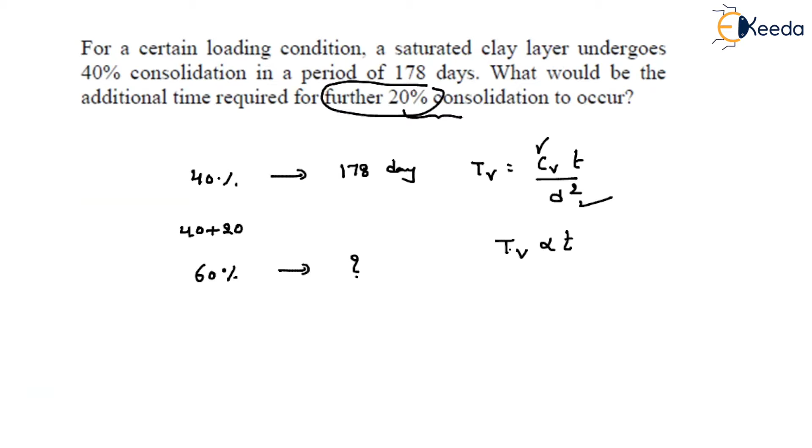As we are talking about a particular soil, Cv is constant, and we are not talking about the drainage path, so d is constant. So time factor is directly proportional to t. How does the time factor depend on the degree of consolidation? If your degree of consolidation is less than or equal to 60%, the time factor is pi by 4 into U by 100 whole square.

Pi by 4 is a constant value, 100 is a constant value. So Tv is directly proportional to U square. So in place of Tv, I can say U square is directly proportional to t. That implies T2 by T1 will be equal to U2 by U1 whole square.

That's it. U2 is nothing but 60, U1 is nothing but 40, whole square. T1 is nothing but 178. From this, tell me how much you're getting for T2. If you solve this, we'll get around 400.5 days. Right. Now move on to the next problem.

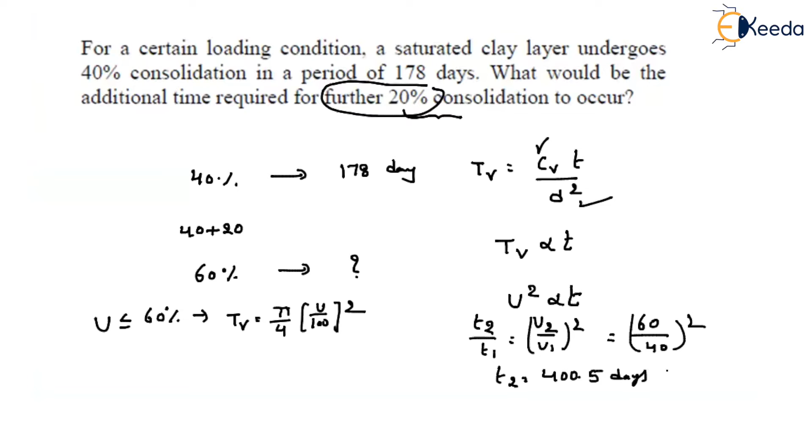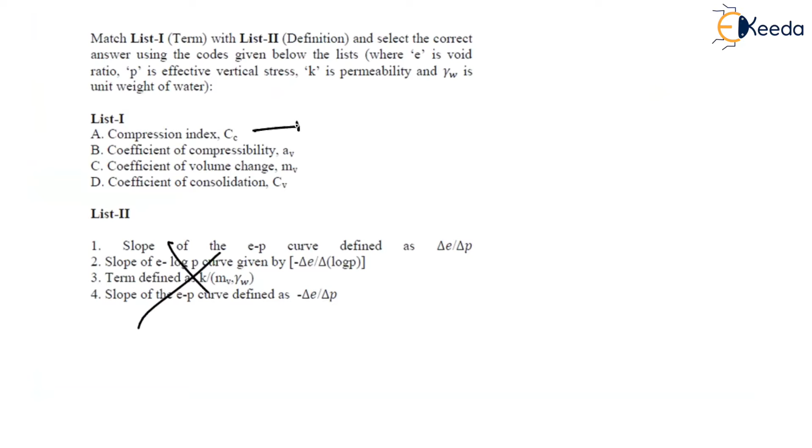Here also it is a match the following list. Let us forget about this list. Okay. What is the compression index? Compression index is the change in void ratio to the log of effective stresses, that means effective stress 2 by effective stress 1. What about coefficient of compressibility?

What is the difference between compression index and coefficient of compressibility? Only the logarithm. Compression index is a constant value. Compressibility will change from point to point. So what is the equation? Delta e divided by log of delta p. Let us say it simply. Sorry, it is not log, simply delta p.

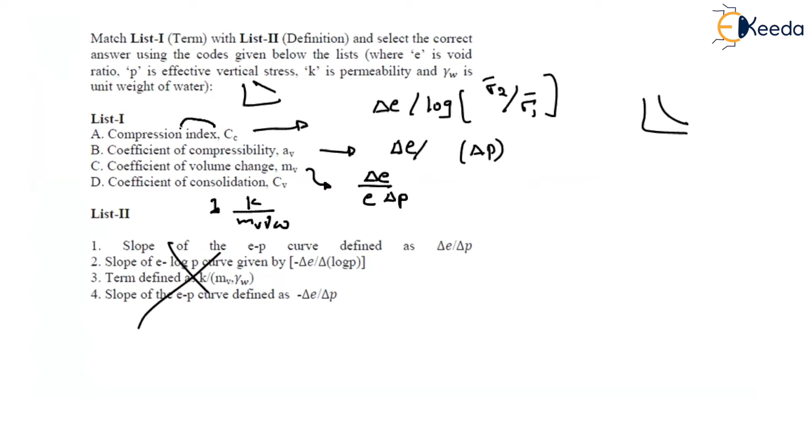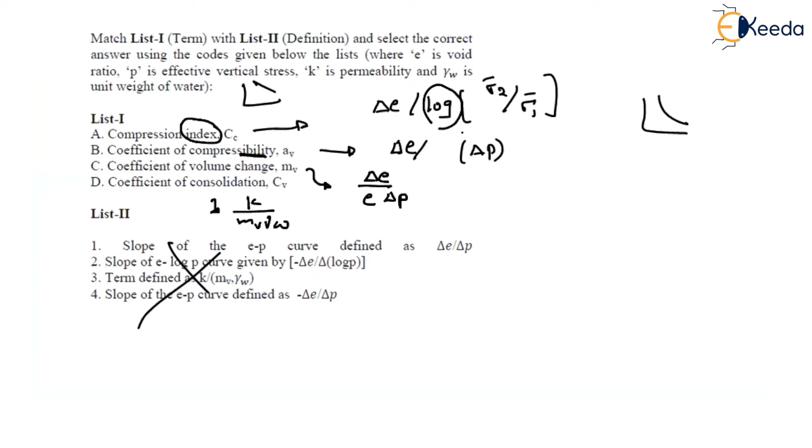I am talking about the index. Index means constant, so that's why remember that we will use the log. If it is simply compressibility, we don't use the log. This is the difference you have to understand. Move on to the next.

So what is given? In a laboratory test on a clay sample of thickness 25 mm, drained at top only, 50% consolidation occurred in 11 minutes. So there is a laboratory test conducted on the clay sample. What is the thickness of the clay sample? 25 mm. And it is drained at top only. That means it is one-way consolidation.

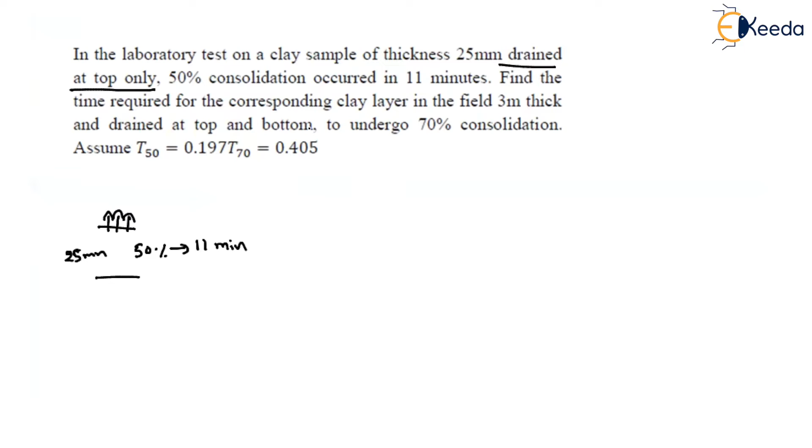So what is observed? To get 50% consolidation, how much time is taken? 11 minutes, right? Now what do we have to find? Find the time required for the corresponding clay layer in the field. That means there is a clay layer in the field having a thickness of 3 meters, drained at top and bottom. So in the laboratory it is conducted with single drainage, but here it is double drainage. So we need to find the time required for how much percentage?

70% consolidation. So what relation can we use? Time factor TV will be equal to CV into T divided by D square. The unknown we have to find is the time required. What about TV corresponding to 70%? If it is less than 60% consolidation, we directly use pi by 4 into U square. As it is greater than 60, in the given question they have mentioned 0.405. What about the D value? As we have double drainage, D is 3 by 2.

Now, what about the CV value? This CV value they have obtained in the laboratory. Apply the same here: TV will be equal to CV into T divided by D square. Now, what about TV, the time factor for 50% consolidation? It will be 0.197. What about CV? That is the unknown we have to find. Time required is 11 minutes, divided by D square. As it is single drainage, the drainage path is the total thickness of the sample.

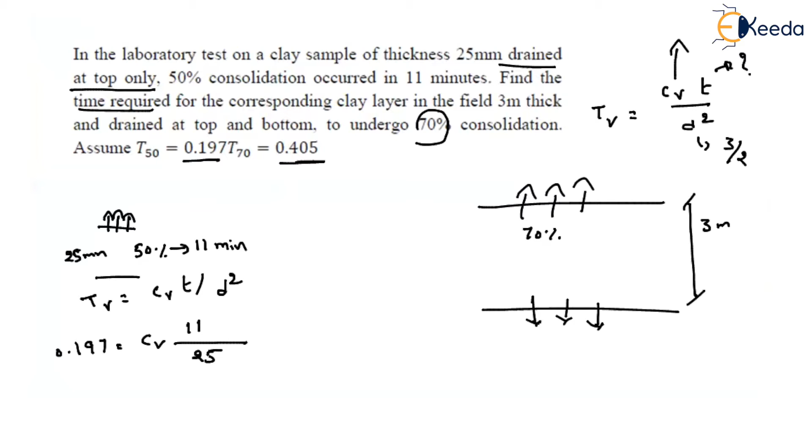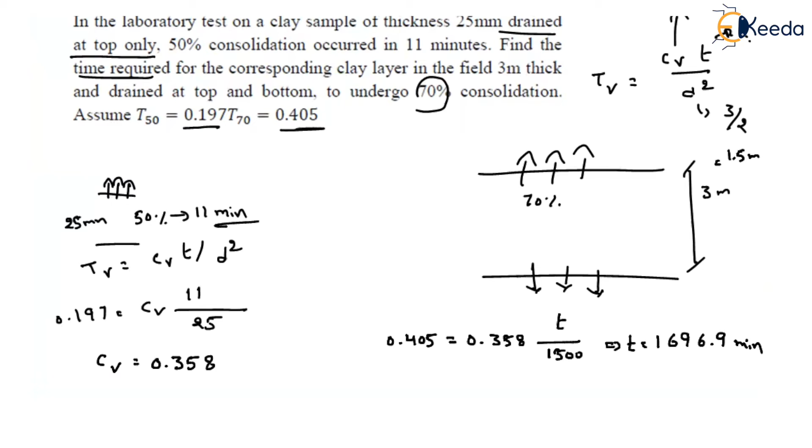So it's the same case, but in one case they conducted the test in the laboratory to find the coefficient of consolidation, and in the other case we apply it to the field to find the time required. Right. Move on to the next.

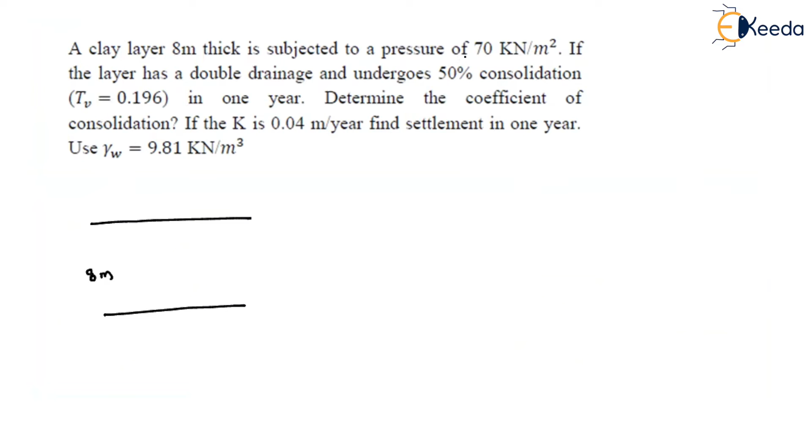What is the given question? A clay layer 8 meters thick is subjected to a pressure of 70 kilonewton per meter square. If the layer has double drainage and undergoes 50% consolidation in 1 year, determine the coefficient of consolidation. If K equals 0.04 meter per year, find the settlement in 1 year. Let us read again. There is a clay layer. What is the thickness? 8 meters. And it is subjected to how much pressure? 70 kilonewton per meter square. Okay, fine.

What they're asking: if the layer has double drainage, so water is expelling from both sides, top and bottom, and undergoes 50% consolidation. In how much time? In 1 year. So what we have to find? Determine the coefficient of consolidation. So first we have to find out the CV value.

If you find out the CV value, what is the formula? That is nothing but K divided by MV into gamma W. Or is there any other relation? We know the K value, but do we know this MV, volume compressibility? We don't know. Then how can we find out? Here they have given the time factor also.

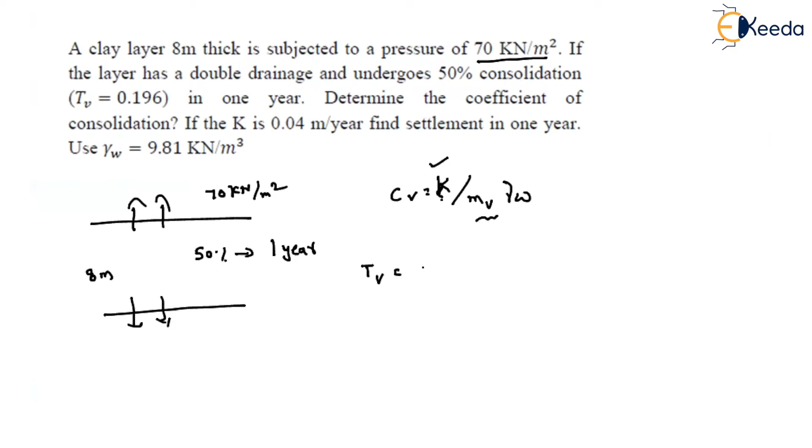So if they've given the time factor, the time factor will be equal to CV into T divided by D square. Corresponding to 1 year, 50% consolidation, what is the time factor? They directly gave 0.196. So 0.196 will be equal to CV into 1 year divided by D square; as it is double drainage, 8 by 2, 4.

That implies your CV value is 0.784. So this is your coefficient of consolidation. What will be the unit? Here you have considered the drainage path in meters square, divided by time considered in years. So that is meter square per year.

Now what we have to find? We have to find out the final settlement. So just recall the formulas to find the final settlement. In the given problem, did they mention anything about the void ratio? Did they mention anything about the compression index? No. Then how can I find it out?

By using the parameter MV. What is MV? It is delta H by H divided by change in effective stress, or change in pressure. If we can find this value, we can find the total settlement. So how? By using this relation: CV, 0.784, equals K value given as 0.04, also meter per year, so in the proper unit, divided by MV into gamma W.

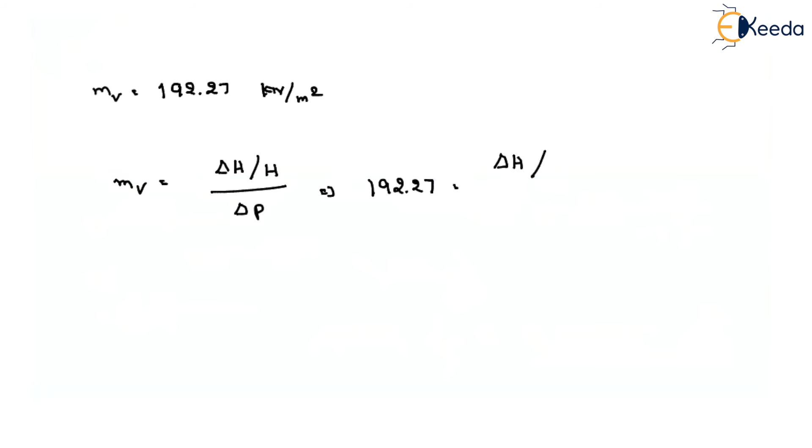That implies 192.27 equals final settlement divided by H, which is the total thickness of the clay layer, 8 meter, divided by change in pressure, given as 70. Now what about the change in thickness? If you solve this, you will get around 0.728.

I think we have done some mistake here, while finding this MV value. If you solve the volume compressibility, you will get around 1.3 into 10 power minus 3. Just recheck the calculation part, okay? Now the final settlement is observed to be 0.728 meters. This is the final settlement that will occur in the clay layer.

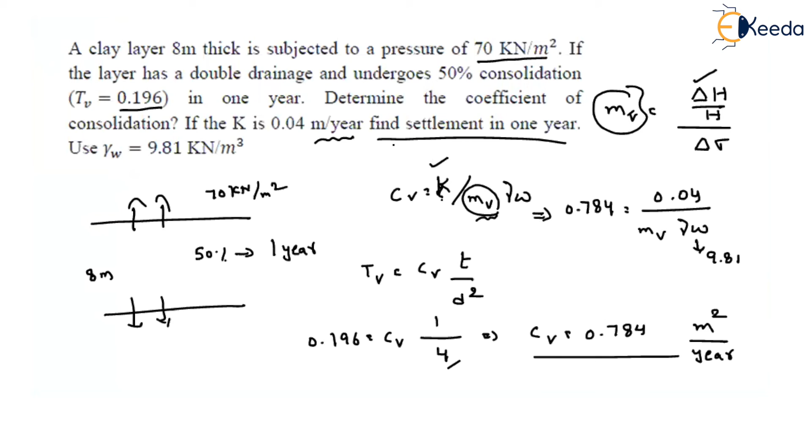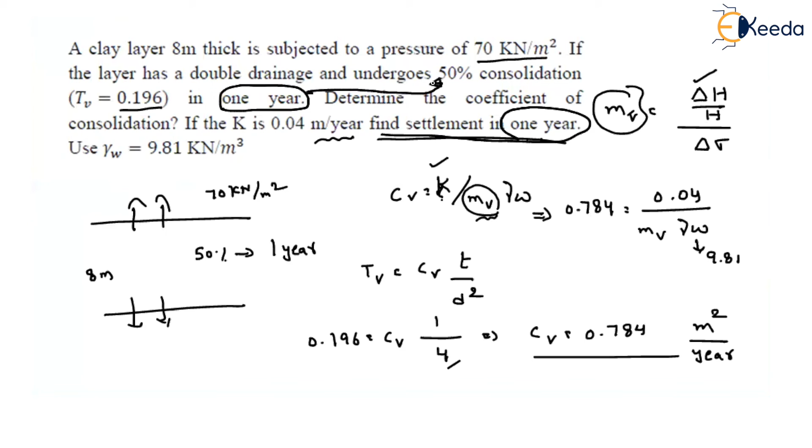But what are they asking? They are asking about settlement in 1 year, not the final entire settlement. In 1 year, how much settlement will occur? The question itself mentioned that in 1 year, 50% of the consolidation happened. That means 50% settlement happened. So in 1 year the settlement is 50%.

50% is 50 divided by 100 into the total settlement, 0.728. So the answer will be 0.364 meter. After getting this value, do not blindly enter it. They are asking only settlement in 1 year, and the question mentions 50% consolidation occurred, so only 50% settlement happened. So answer 0.364 meter.